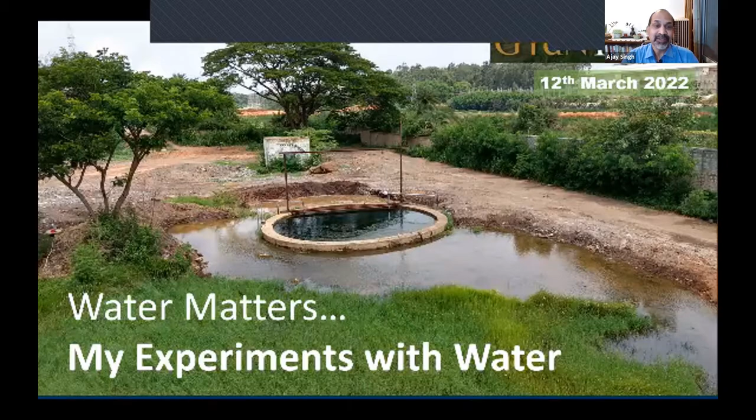My talk is going to be in form of a presentation, but it's not going to be a very staid and a sarkari kind of presentation. That much I can guarantee you. Okay, so I think nowadays all of us agree that water is something about which all of us have to become serious. And as Apurva told, not only in the context of the residential scenario, but even in organizational scenarios like railways or factories.

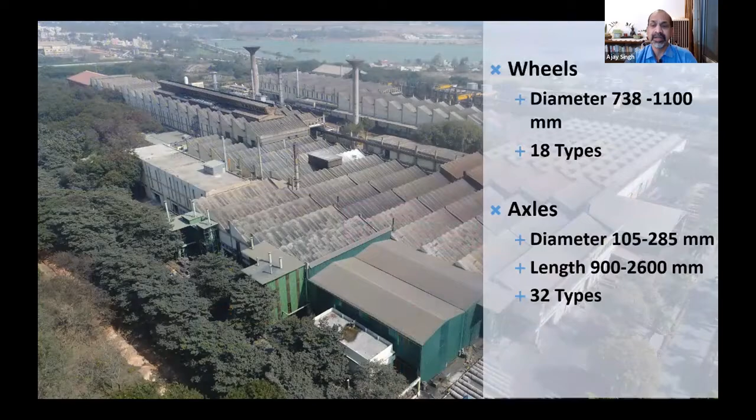So today I'm going to share my experience of Rail Wheel Factory, where we were able to successfully take the requirement of our processed water from rainwater harvesting at a very, very large scale. In this presentation, I'll be mainly focusing on what we did. There are many questions which I'll leave to the end of the presentation. So Rail Wheel Factory is a unit situated in Bangalore. It's a unit of Ministry of Railways, and we manufacture wheels and axles for railway applications. And this photo, by the way, has been taken by Apurva.

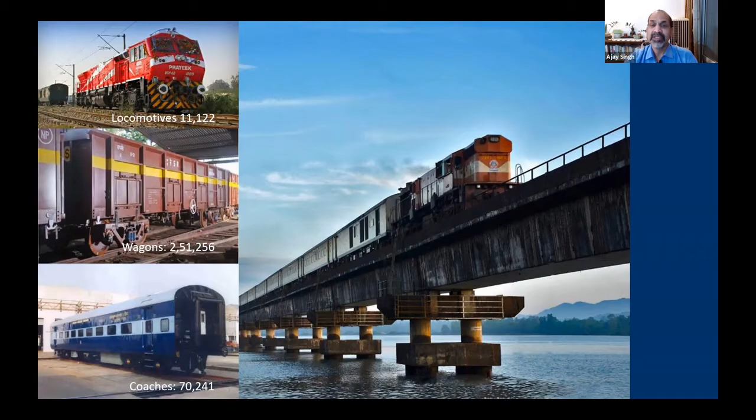This explains where Rail Wheel Factory fits in the overall scenario of Indian Railways. Indian Railways has a very large fleet of rolling stock. We have almost 11,000 locomotives, more than 2.5 lakh wagons, almost 70,000 coaches. And all of these have something called a bogie. Normally a non-railway man calls a coach, the passenger vehicle where one sits, a bogie, but that's a misnomer. A bogie is a structural part which sits below the coach and the wagon as well as the locomotive.

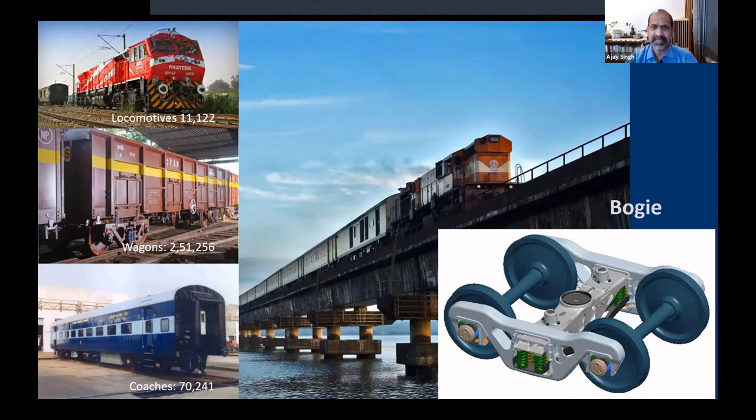So at Rail Wheel Factory, we make the wheel set. The component you see here in gray, the two wheels and the axle combined, is called a wheel set. We manufacture wheels, axles, as well as wheel sets. On a typical day in Rail Wheel Factory, a wheel is cast every 2 minutes, an axle is forged every 4 minutes, and a wheel set is formed every 6 minutes.

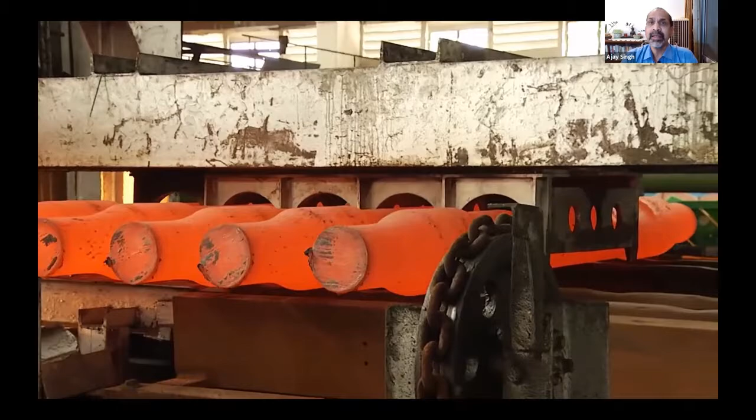So this is a small video clip I'm just adding. You can see when we are casting almost 400 tons of steel and forging almost 200 tons of steel every day, definitely the Pollution Control Board will classify us as a red category industry.

So we do have a large water footprint, and if you take RWF's water balance, our fresh water is sourced from STP, BWSSB fresh water, recycled water from BWSSB, that is Bangalore Water Supply and Sewerage Board. Sometimes, very rarely, we get water from tankers also. We have our own bore wells, and we do have some open wells.

On the consumption side, the main consumption is inside the plant. We have the administrative building, hospital. We have two residential colonies, East Colony and West Colony, and we have a big marriage hall called Utsava. So RWF is spread over a campus of almost 291 acres, out of which 191 acres is in the plant and 100 acres in the two colonies.

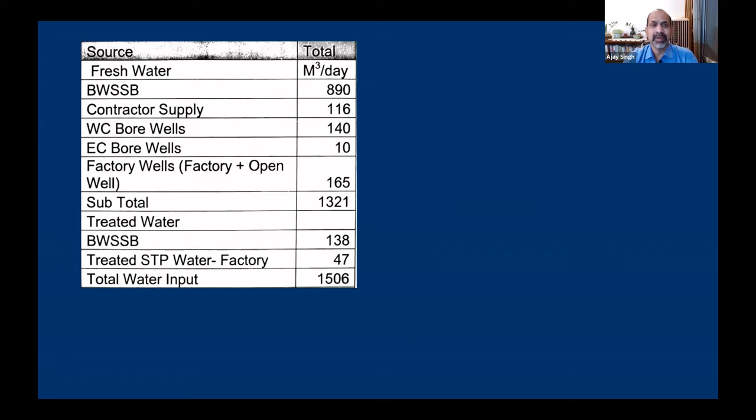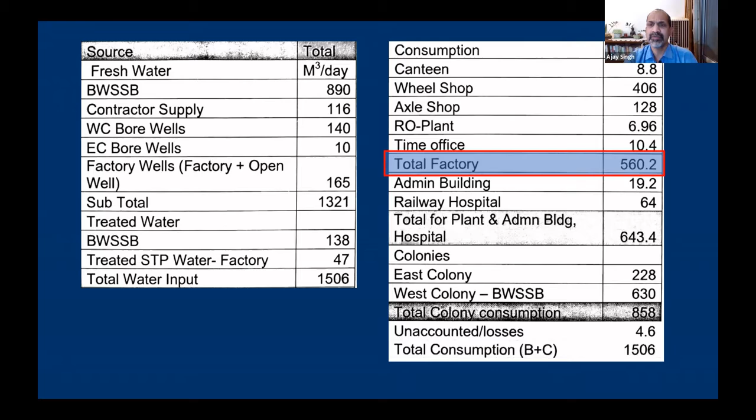So if you see on the supply side, we are almost getting 15 lakh liters of water every day, which we are consuming. This is a measure of how it comes from various sources. And on the consumption side, again, this balances off. And basically, inside the factory, we are using almost 5 to 6 lakh liters of water every day.

Now, inside the factory, the main consumption of water is for process cooling. Basically, we are a hot shop. We are a big foundry, huge foundry. And for cooling of our furnaces and other equipment, we need almost 2 to 3 lakh liters of water every day.

When we see a typical wheel, or for that matter, any product, we think that it is only made up of steel and various alloys and other things. But now a concept of embedded material has also come up. If we really see, lots of things are embedded in it. All these are substances, elements and raw material which, besides the normal raw material, have also gone inside the wheel.

So if you take a typical wheel, besides the steel and other things, it will have water. It has a sand footprint, lots of plastic in packaging of incoming raw material and other things. Wood is used in packaging. So it is having lots of embedded substances inside it, besides the obvious raw materials. Now, water amongst this is one of the most important embedded elements.

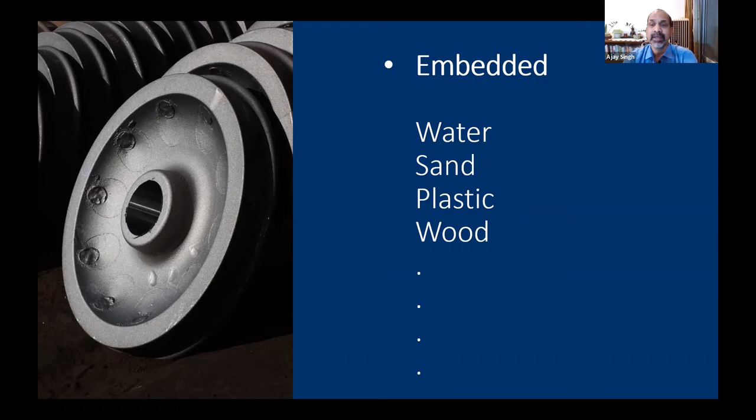And if we do a rough back of the envelope calculation, we make almost 1.5 to 2 lakh wheels every year. So in each wheel, 200 to 300 liters of water is embedded.

We do have a... excuse me.

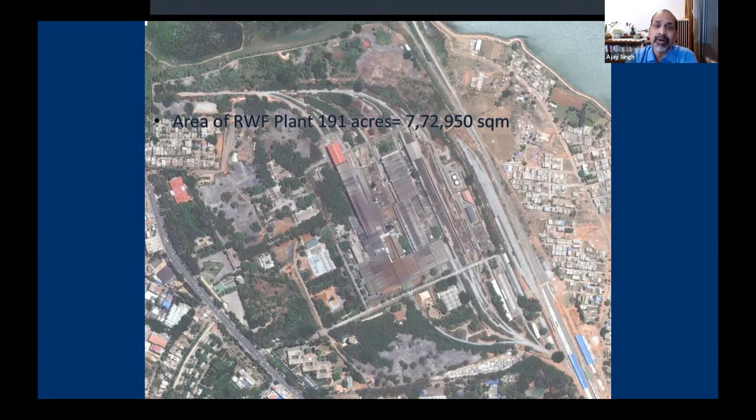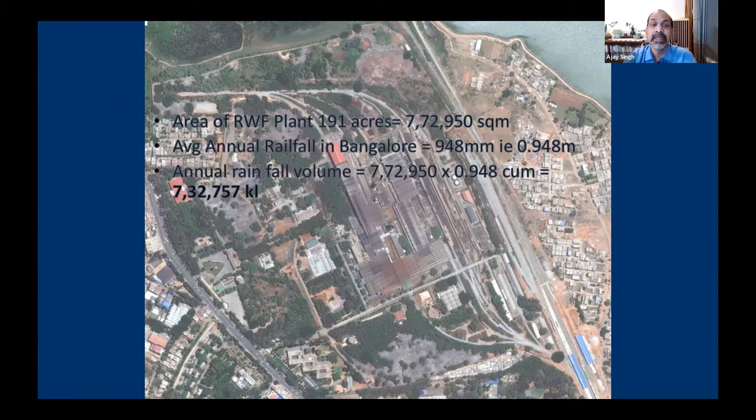The area of plant is around 191 acres, which roughly translates to more than 7 lakh square meters of land area inside the plant. If you see the annual average rainfall in Bangalore, it is almost a meter, and multiplied, the rainfall which comes on the campus of the plant is more than 7 lakh kiloliters.

So once we started this project, this was a rough calculation we did, and our plant daily requirement, taking around 3 lakh liters per day and 300 working days maximum in a year, was coming to 90,000 KL. So you can see very well that as against annual rainfall coming onto the complete campus of 7 lakh plus kiloliters, our requirement was only 90,000 kiloliters.

So this gave us some kind of assurance that if you are able to harness a good part of rainfall which is incident on the campus of RWF, we will be able to meet our process water requirement. So we started with this premise. We also found out that the maximum lean period, based on 100 years of meteorological data, is 100 days. That is in our part of Bangalore. Within 100 days, definitely some kind of rains will be there.

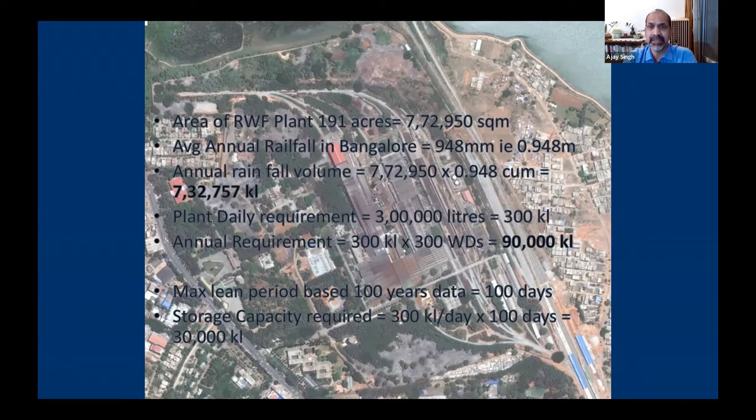So if you take a straight back of the envelope calculation for engineers, the storage capacity required is 300 kiloliters per day into 100 days, almost 30,000 KL. But after this calculation, I abandoned all engineering. In this project, what we used is basically the rainwater harvesting techniques which are prevalent in traditional rainwater harvesting. And in this complete project, where we became water self-sufficient for process water, we did not create any big concrete storage structures and others. We'll see as we go ahead with the presentation.

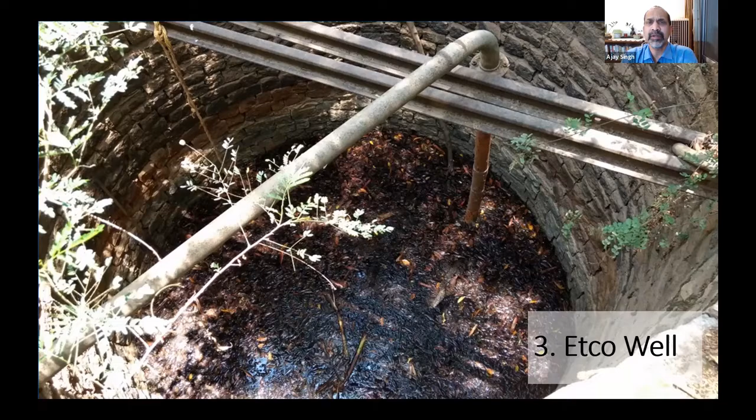So this is a close-up of the RWF plant area, and we had a low-lying area. So what we did was we tried to develop our project around this low-lying area. And when we looked around, we found that there were 2 wells there. One was named Kandaswamy well, another was called Damodar well. Then on further inquiry, we found out there are 2 abandoned wells also. The third well was called Etco well. And somebody told me that there is a 4th well. It took almost 1 month of hard looking around and clearing off a bit of jungle. Then we discovered that, yes, the 4th well was there. So when we started our project, we had 2 active wells and 2 totally defunct and abandoned wells.

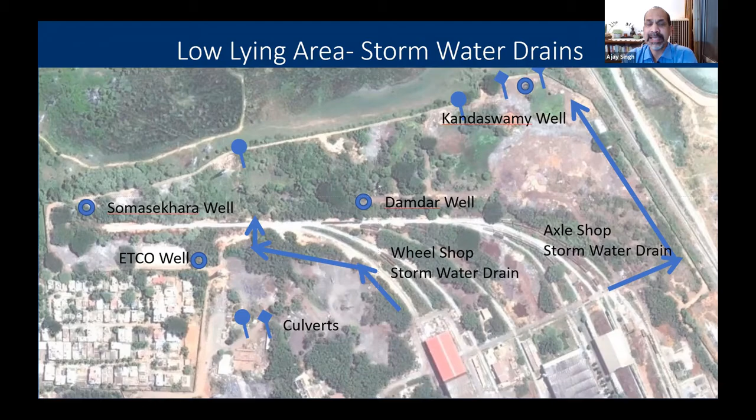So for the catchment area, we can distinctly tell that one catchment area was of the axle plant, another was of the wheel plant, and there was a third catchment area which was basically covering our front entry area and our marriage hall area, which is called Utsav. So these 3 catchment areas we identified for the complete plant. And luckily for us, this low-lying area had inherent boundaries. On the north of it was the actual wall boundary, which separated this low-lying area from the Putanhalli Lake and marshy land beyond it. And on the south side, you had this straight white line, which is the track, on an embankment.

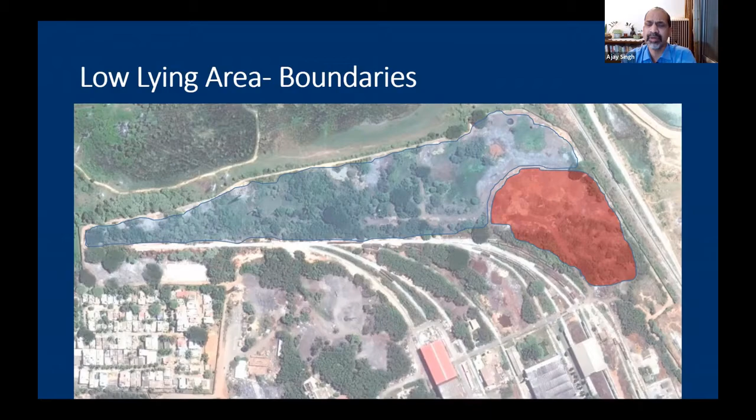And this red area is where we dump all our foundry waste which we cannot co-process and use. Over a period of 35 years since this plant was in existence, we have kept all this material. So these three formed a natural boundary for our low-lying area, and we started working on this low-lying area. That was the plan. So this is a still close-up of the area. In the satellite image itself, you can see this small well, Kandaswamy well. We have one well inside here called Damodar well, and another fourth well somewhere here. These are the stormwater drains.

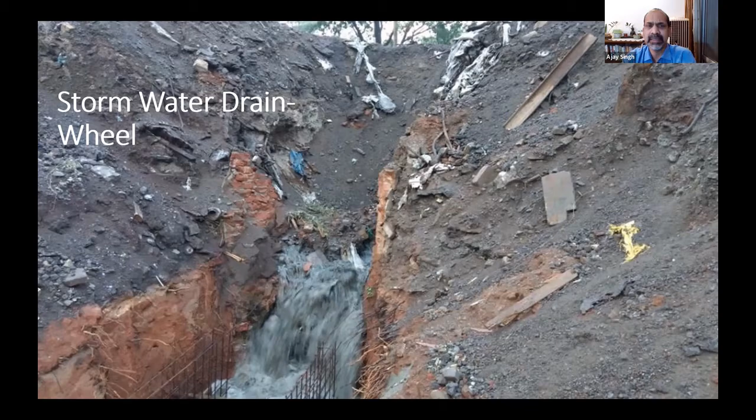So initially, when we started this project, we thought we will make our own lake inside the factory. So we named it VAP Kere. VAP is basically wheel and axle plant, which is the original name of rail wheel factory. The plant started as wheel and axle plant in 1984, and in 2004 it was rechristened as rail wheel factory. Still lots of people have very fond memories of the name VAP. So we named the water body we were planning to create VAP Kere. Kere is basically a lake or a pond in Kannada. So this is the name of the lake we thought we'd make.

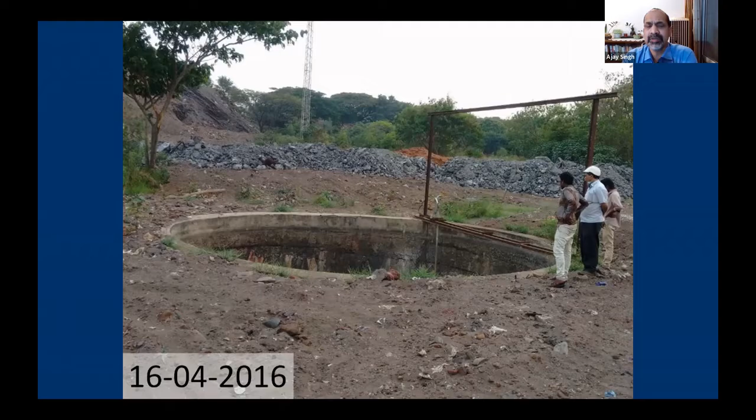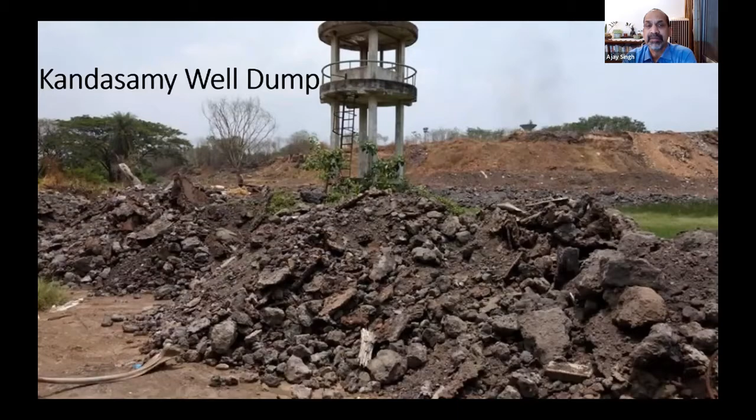We started this project in 2017, but I had visited it one year before, in April 2016, and this was the condition. You can see in the background, foundry waste is lying, and this is our biggest well, the Kandasamy well. It's almost dry. And around this area, lots of dumping was taking place. Besides the foundry waste, lots of mixed waste, even the canteen waste was going there. This was the scenario we had when we started this project.

In some other part of that low-lying area, we had lots of packaging being dumped there. People had started burning waste also, as they could not think of any other way of disposing of it. So this is one of my colleagues in the white shirt, Mr. Siva Subramaniam, who played a key role in the project. And behind him is Mr. Vishwanath. He's my water guru, and he's a very prominent water figure in Bangalore.

So he came, and when he saw the wells, he was very excited. He told me, if you take care of these wells, you will be able to get your process water requirement of 2 to 3 lakh liters. So that gave me some confidence. In front, the red board you see is the original data for the well. The well is almost 10 meters in diameter and 12 meters deep. It's a huge well, the biggest well in the RWF campus, but still its yield was only 25 KL per day, 25,000 liters per day.

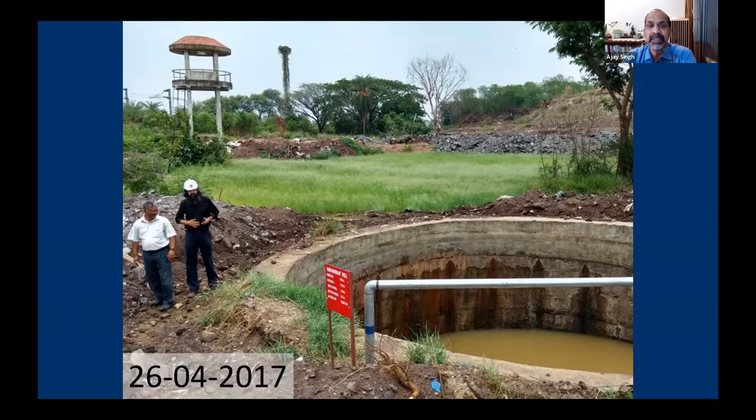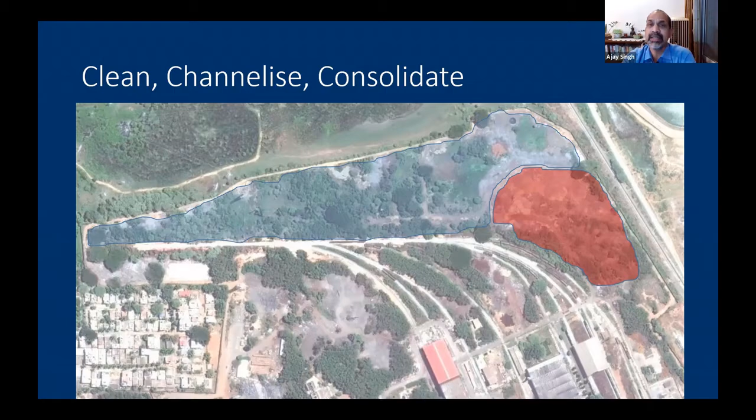So we started properly after Mr. Vishwanath's visit. We formally started phase 1 of the project on 2nd of May 2017. We thought that we'll clean up the whole area, we'll channelize different water streams, and we'll consolidate whatever water bodies we create. With this motto, we started off. First and foremost, we took out some old railway sleepers, put them there as markers, and created an eco zone. We told everybody that this is now an eco zone, and no one should dump anything in that area. So we first stopped fresh ingress of waste material in that area.

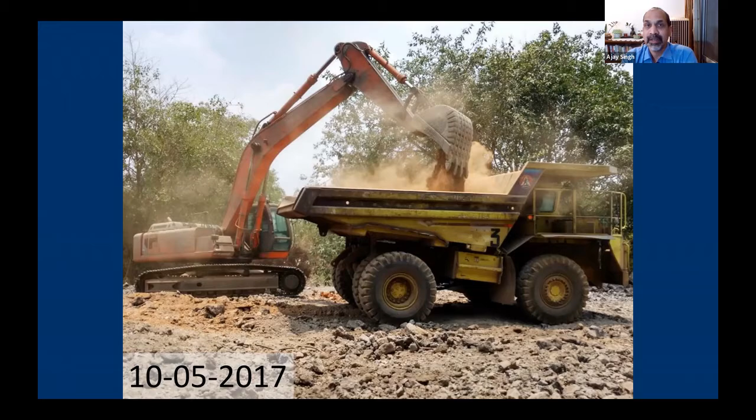On 27th of May, Mr. Vishwanath, who's got a Twitter handle of Zen Rainman, published an article in The Hindu on our project. Our project, mind you, had just kicked off, and he wrote that a walkabout can save the city, and he gave our project as an example. That was a big booster for our team. We thought, okay, we are just beginning, but we are on to something really good and really positive.

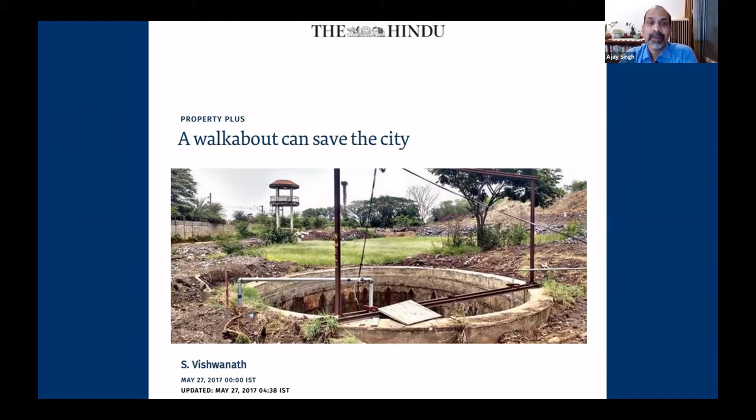And actually, when I had planned for joining as a part of the inauguration, I never knew how much water, what kind of water, was there.

On World Environment Day, 5th of June 2017, even before the project went on full steam, I declared in the function that we are going to have this project. We are going to create our own water bodies, revive them, and become self-sufficient in our process water requirement.

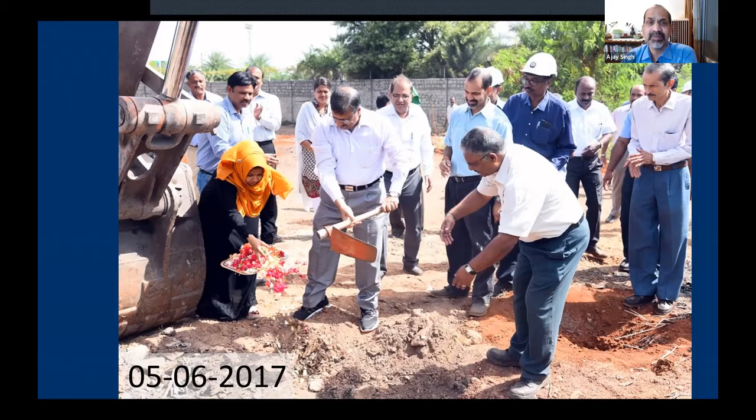We took the head of our family, the general manager, Mr. O.P. Agrawal, and we asked him to do the groundbreaking for the function. So he did that, and we took all the senior officers and asked them to do some tree plantation. By the time the tree plantation was being done, we had placed our poclain in such a manner that in one go, he was able to connect the two water bodies.

And like a very good omen, a good portent of things to come, we saw water gushing in from one water body to another. It was a very positive sign, and we were very happy about that.

One of my colleagues, the security commandant, who is otherwise a very stiff and rigid RPF officer, brought some ducks for the occasion, and he left those ducks in the water body we had cleared.

So after this, the function and everything was over. Then phase 2, the real act, started. From the 6th onwards, the real work started.

And to my disappointment, what we saw on the 6th was that we had joined the two water bodies, but whatever water came from the upper water body to the lower water body just went out from the culvert.

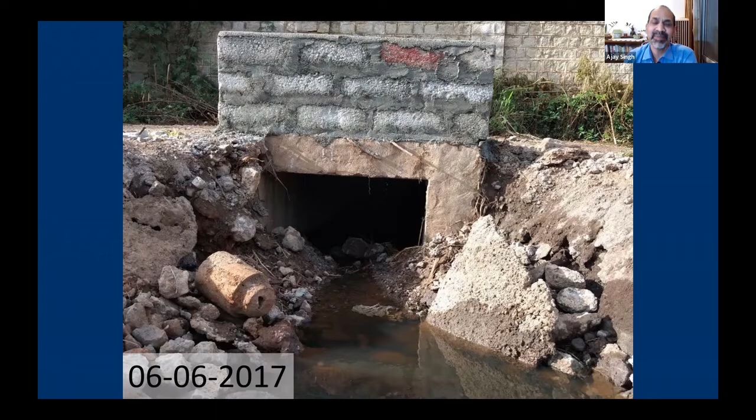So that was kind of a big setback, and we started thinking what to do. This is the place from where it was going out, simply going from the so-called not-yet-to-be-born Vapkere to Puttenahalli Kere.

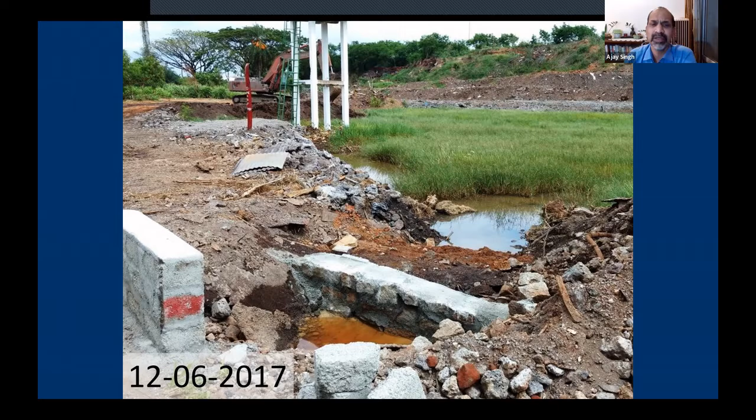So I thought about making a simple bund here. We created a wall so that our water would be held inside our campus, and only excess water would overflow to the culvert. So there was a small intervention which we did, and after that, you can see this bund in action here.

First, we started working on the stormwater drain. We started diverting it. We made some concrete path for the water to flow down because it was at an elevation of almost 5 meters.

It was very deliberate. It was kept kaccha so that lots of water would get absorbed there, and the wild vegetation that grew inside it would slow down the velocity and force of the water. Otherwise, there was a chance the water, coming with so much force because of the gradients, would overshoot and might even damage our boundary wall.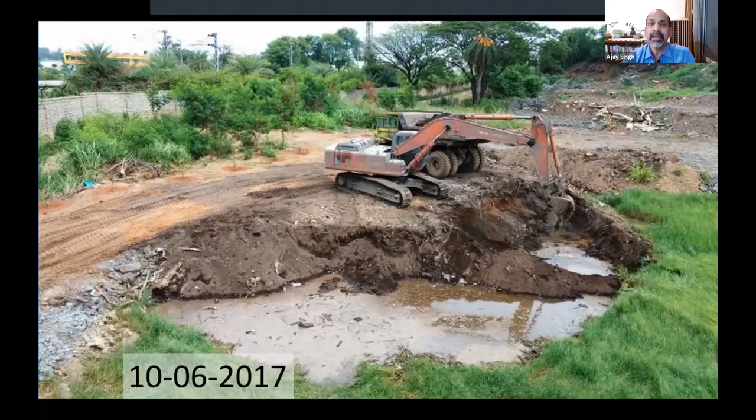So we created a water path like this towards our water bodies. And on the other side, we started enlarging this water body. This is the exact location where we did the inauguration of the project. You can see we have deployed the Poclain and the dumper, and we are digging out the area.

While creating this water body, we had not used any cement. We have not even used anything for stone pitching or for securing the embankment. We just left a slope and let the plants and everything take care of it. So these are some of the pictures over a period of time. During the initial phase when we were enlarging this reservoir, you can see already so much water has collected there.

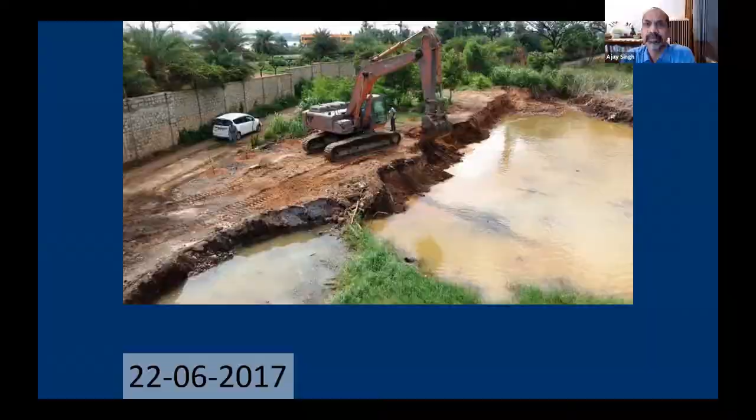On one of the days, rather it was a night, 8 o'clock, when I was going around this, on the right side, the stormwater drain is there on the height from the axle shop. It comes and almost takes a very rough 90-degree turn. It's very violent here because it's very difficult to tell water to take a right turn or left turn.

So we thought that if we leave it as it is, the force of the water will cut the road which is there, the peripheral road on the left, and it will damage the boundary also, which you can see on the left. So we did some kind of stone pitching here and made a gentle sloping curve so that the water can get diverted 90 degrees here.

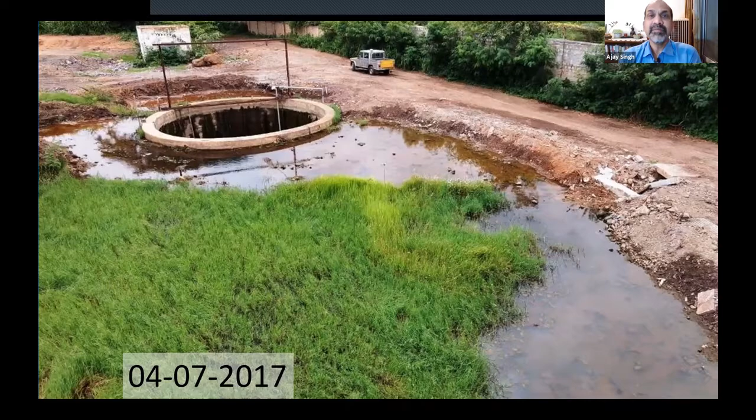So after a month or so, we had enlarged the area around the well. You can see a freshwater body has been created on this side. The digging we saw was on the other side, and this is the reservoir that was created. You can see the slopes are still raw, they have not yet stabilized.

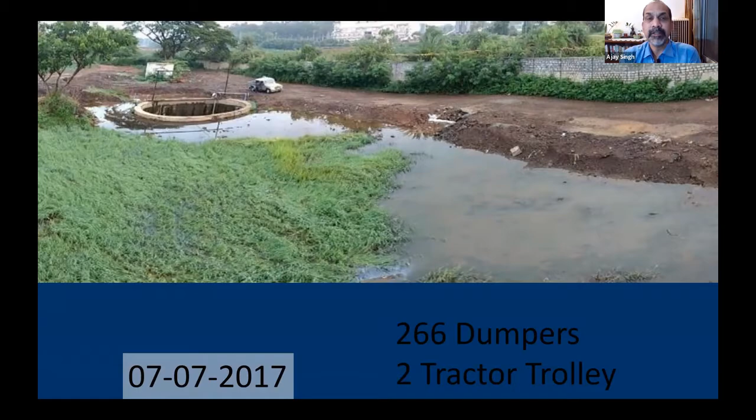So by 7th of July 2017, we had already moved almost 266 dumper loads of muck as well as earth that we took out for creating these water bodies, and 2 tractor trolley loads of various packing material and other things. So here you can see the well, it is full, and this well itself, when full, holds almost 10 lakh liters of water.

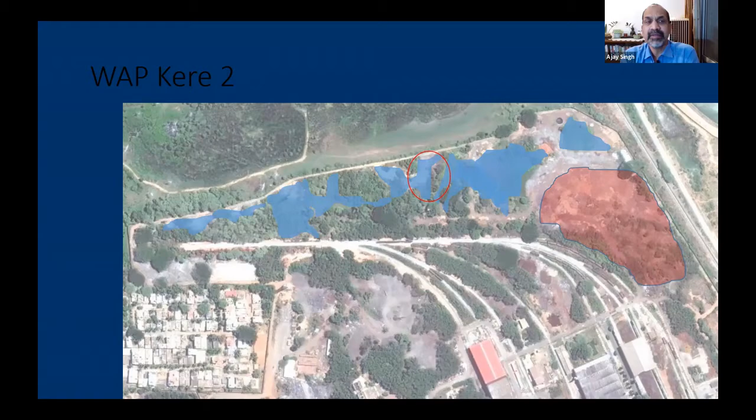Then after this, we moved on to the second phase of the project, which we call WAP Kere 2. So this was actually one of the water bodies. You can't see any water body here because it has been filled up with all foundry waste and debris. So here we started digging, and after about a month of hard work, we could create this water body.

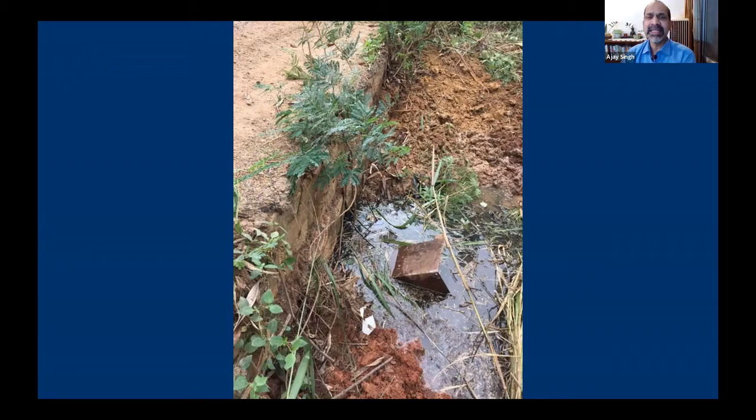At this stage, we again encountered another culvert we discovered where water was going. So here also we did an intervention. We didn't make a proper masonry kind of bund, but we just made a mud bund around this so that area will also hold water.

So then this is how we charge the Damodar well. This well already was our best yielding well, but before we rejuvenated this area, it was giving around 75 KL daily output, which again went double to almost 1.5 lakh liters of output every day.

Then we started working on a remaining portion of the lake system that we had planned to create. We went to the seventh segment of this, and we created a very linear kind of water body there. These are some photos during the making of that water body.

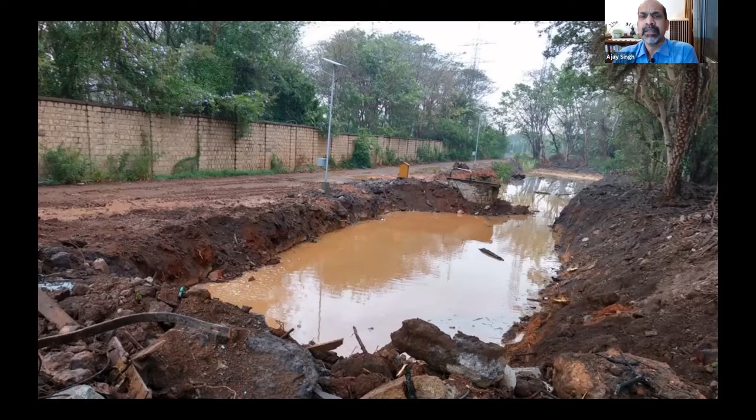After this was made, following the first rains, you can see it has water, but it's very muddy because the soil dug is very fresh. This was the well which was recovered in the center.

Then we actually came to the other side of the track. All these 3 wells were on the north side of the track. Then we came to the south side of the track to take care of the 4th well, which was the Itko well.

The Itko well was getting water from the catchment area of the Wheel Shop as well as from outside, from the Utsav side. So we had a very peculiar thing there inside.

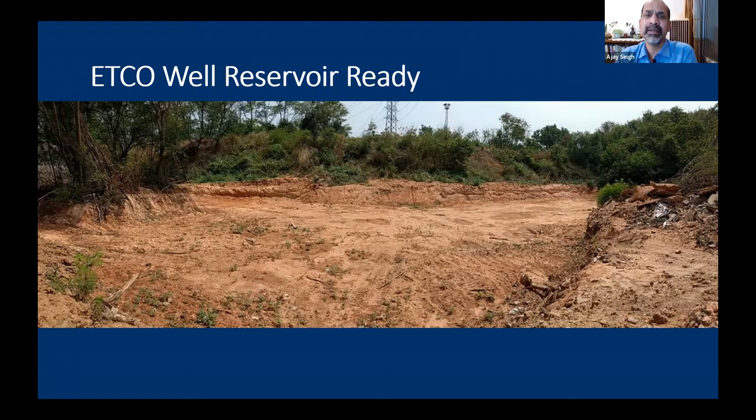In the background, what you see is the embankment on which a railway track is there. So this was just abutting the railway track. After the first rains, you can see this is full of water, and of course, because it's the first rain, it's all muddy.

This from one end and this from the other end, where at the far right you can see the well also, here is the ETCO well. So we created a big water body all around, which went into the area where the stormwater drain from the Wheel Shop was coming. This was the fourth well which we rejuvenated.

This also started yielding almost 15 to 20 KL of water every day. This new reservoir, since it was totally dug new, took almost 2 to 3 years to stabilize, and nowadays it has started holding water. Otherwise, after rains, within a week or so, all this water used to disappear.

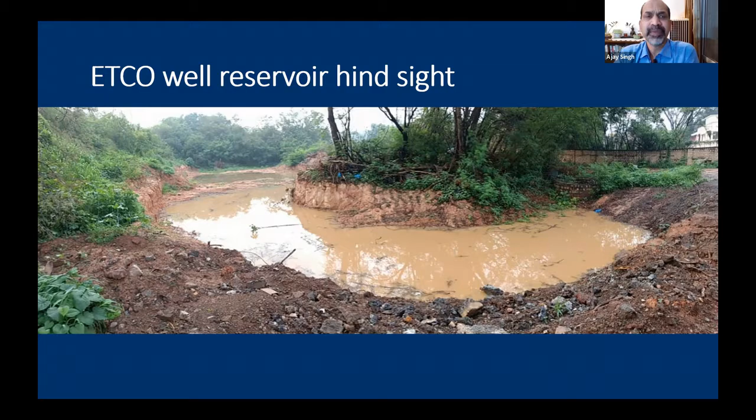So this is well number 3, the fourth well in our talk, which we rejuvenated. And this is the reservoir we created. It was getting feed from the Wheel Shop catchment area, as well as from the area I told about, the Utsav. This is the place, the red dot, where we created an opening in the marriage hall area boundary.

So that the water could flow like this. This is the small opening, a 1 foot by 2 feet opening what we made. This also solved the problem of flooding inside one part of the marriage hall.

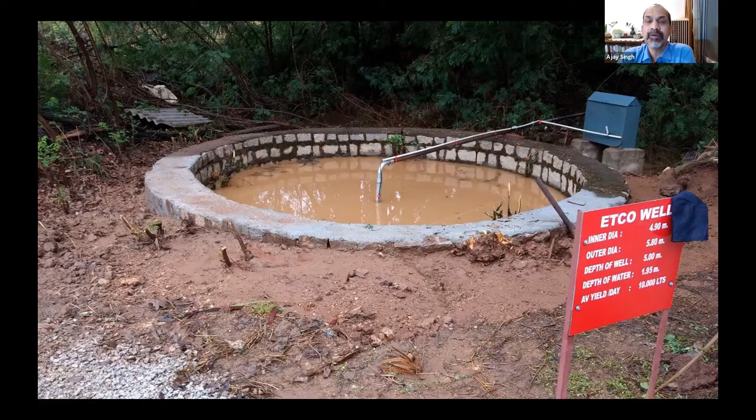So this is a photo of the well after we had rejuvenated it. Of course, because the wall was very low, even the surface runoff entered, and that's why this water is very, very muddy. After that, we took up cleaning of these 4 wells also.

So this is how we started our journey. This was the condition of the ETCO well when we started, and this is post-rejuvenation. So this is, in a very fast manner, the 4 water wells we rejuvenated and how we rejuvenated them. Of course, the whole exercise was spread over almost a year, and in between we had a big setback.

Adjacent to this, our water body is there. But one fine day, somebody told me that one big area of 50 meter by 100 meter in that place is being handed over to Southwestern Railway for putting up a traction substation. This would have destroyed our complete project, because this is the first landing for our stormwater drain where the water was coming and getting collected.

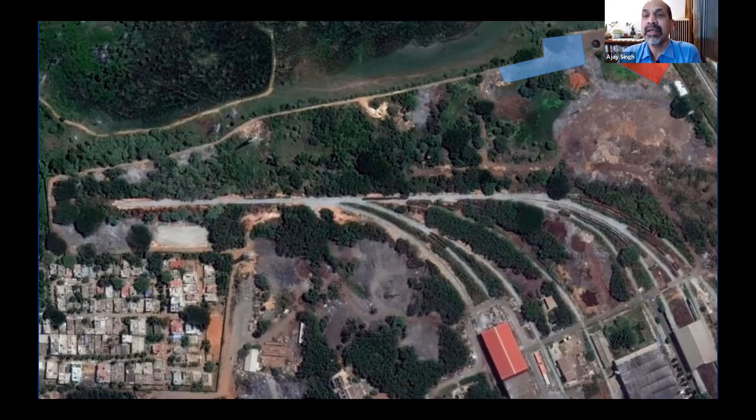So we opened a dialogue with Southwestern Railway from RWF, and we persuaded them to shift this traction substation to a slightly adjacent location. And in the process, we saved our main water body. And one very interesting thing, this is the constructed traction substation. The traction substation is behind this boundary. So we took advantage of this problem and we turned it into a solution.

I was taking out lots of earth for creating these water bodies. In fact, by the time the project matured, we had moved more than 1,000 lorries of either muck, mud or earth for creation of these water bodies or clearing this area. This traction substation is an electrical substation, so it has to be at a height. And since this was a water saturated area, you can see there is a ground level which is higher than the ground level outside.

So all the earth we were taking out from the water bodies, we dumped here, and we used their area of 50 meter by 100 meter to deposit it. Secondly, we gave them the land but not the water. Whatever rainwater was falling, we asked them to design in such a manner that we had weep holes all over the boundary, and a collection gully all around this, which used to feed into the reservoir for the Kandaswamy well. So this problem we turned into a solution for ourselves.

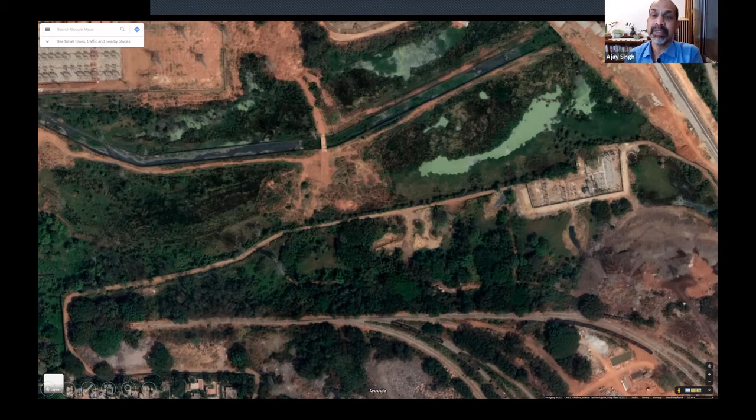So this is now the constructed traction substation. You can see this water body is not affected. Here also there's a water body which is not affected, and in a corner we gave them the land. So this was one of the problems which came up while turning this whole low-lying area into a wetlands water body. But there was another problem going on in parallel, for quite some time.

Since we are a big foundry and we are almost inside the city nowadays, we had to take lots of efforts for dust mitigation in the exhaust of furnaces. So we had this huge structure called the primary fume extraction system, through which all the hot air from the furnace exhaust used to get cleaned of all dust particles, and the emissions coming out of the chimney will not have any suspended particles.

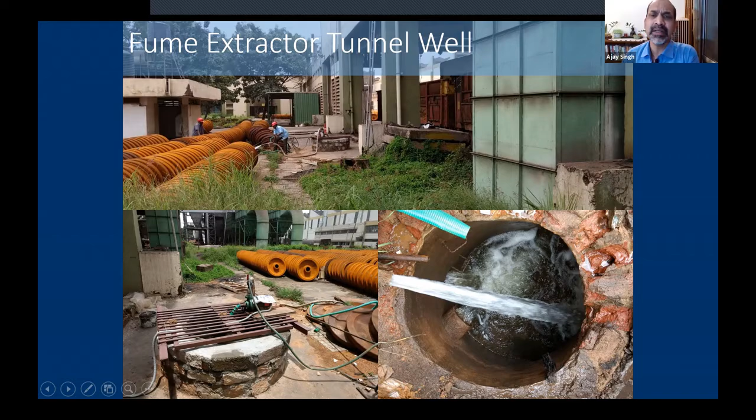This immediately affected the efficacy of our fume extraction, and our emissions were increasing. So to solve this problem, we sank a mitigation well adjacent to the fume extraction tunnel to take care of the water seepage. We put an auto pumping arrangement in this, and this well started yielding water without our intervention. In our furnace basement area we put another well, and the average daily yield of these two wells combined was almost 16 kl.

Cumulatively, in this old data, we had more than 1 crore liters of water from this problem. These two wells were created to solve the problem of water seepage in the tunnel, and they kept on giving water output, which we put back into our cooling water system.

Then we went to create another thing. We saw that during rains, from our down pipe, this is a 6-inch diameter down pipe, you can see the extent of water which comes out.

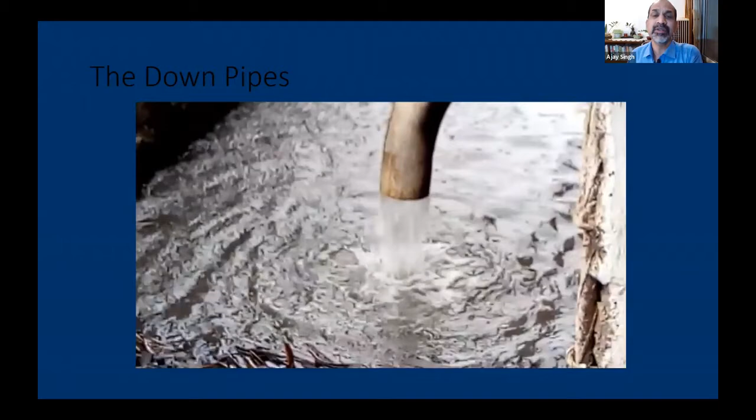So what we started doing was, we made something called a rainwater mega harvester. This I designed based on my experience of designing bio toilets for Indian Railways. In this, we diverted 6 of the down pipes from the rooftop, and the rainwater will come, it will get filtered, it will get sedimented, and with overflow in this big 60 centimeter pipe, it will go to the cooling water circulation system adjacent to this installation.

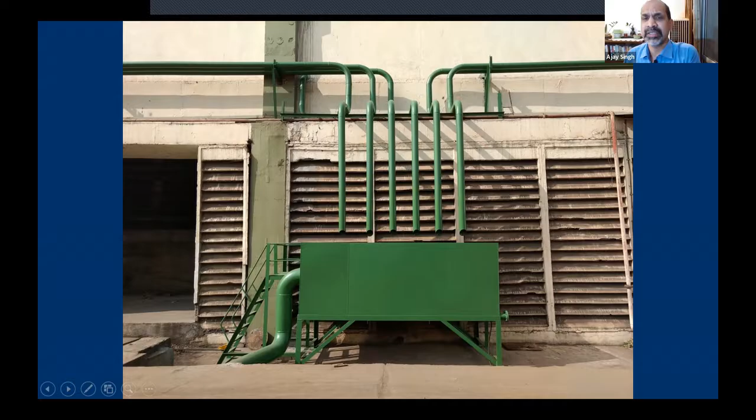So this is the first trial we did after one of the rains. You can see this water is getting collected here, and it is getting shifted to the adjacent cooling water system. You can see the yield here. So the best part of this installation was that we were capturing not only rainwater. In the earlier instance, when we were developing the wells, we used to collect rainwater at a mega scale, let it go and get seeped, and we extract the water. So lots of pumping was involved.

In this installation, we were not only capturing the water, we were capturing the potential energy also. These rainwater mega harvesters were automatically yielding almost 25 kl every rainy day. So we put 4 mega harvesters like this, which between themselves were giving about 1 lakh liters of water.

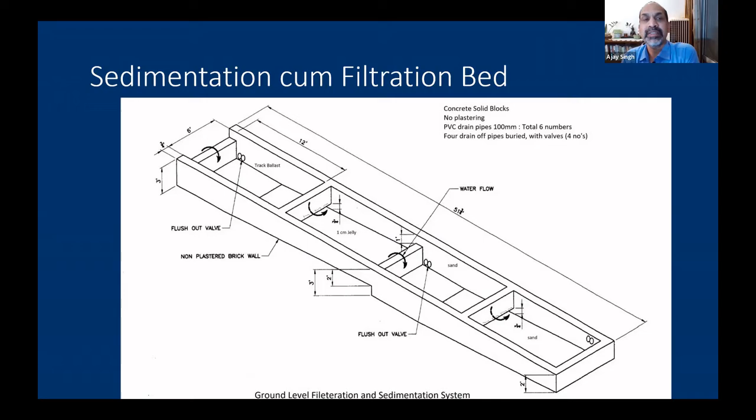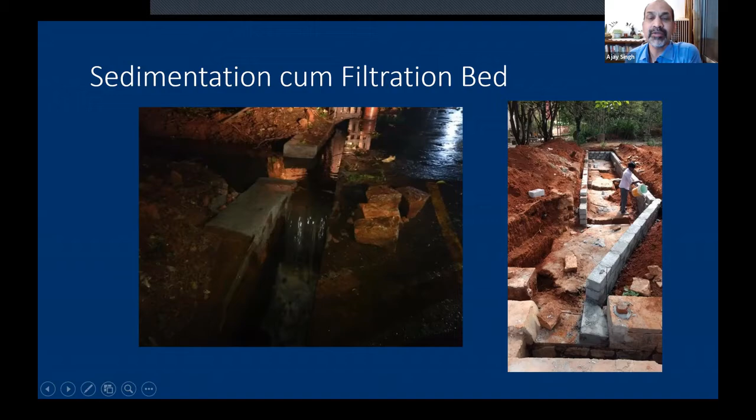In one of the areas near our pump house, which was a low-lying area, we created a sedimentation cum filtration bed, where once again no pumping was involved. The rainwater used to just flow. Here on the left, you can see the rainwater is getting captured, it is getting diverted into this structure, and we were using the head available, the gradients available there, to push the water directly to the ground level reservoirs. two 70 kl reservoirs are there in the background.

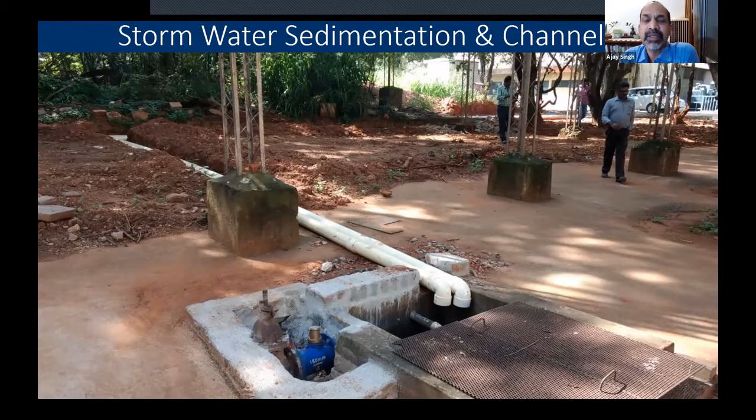You can see this storm water collection channel is there. It overflows. There are 4 sections. The water flows under, then over, and then under, and then finally on its own it flows and goes into the 70 kl ground level reservoirs. So this is after construction, and here you can see the pipes which we laid for putting the water into the 70 kl ground level reservoir. The structure is in the rear here, and here you can see during trials.

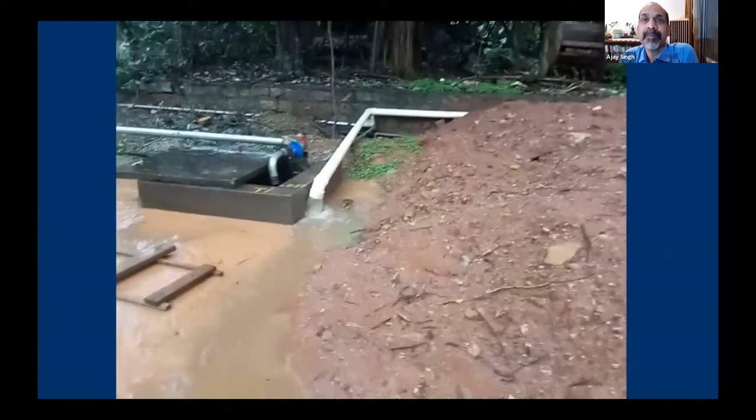This is after rain. You can see water is just coming out. There's no pumping involved here. Water is getting sedimented and filtered, and these are the two outlets. Just before we connected it to the outlet, we were testing. So you can see such a good flow is there. And this contraption itself was yielding more than 1.5 lakh liters of water every rain.

So because of all this, what happened? We became water surplus. In fact, during rains, we were having water which was overflowing all our cooling water system ground level reservoirs. We have 18 lakh liters ground level reservoir at the pump house. They were overflowing. This is a graph of how we used to source BWSSB raw water for plant cooling water requirement. You can see we started the project in June, and by September 17, we had stopped taking raw water from BWSSB.

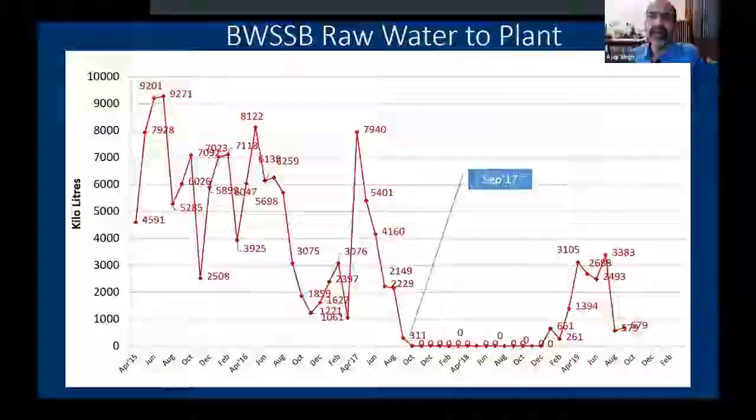But again, in January 2019, we had a very dry season, because of which our well yield was not enough, and we had to take water from BWSSB. So this prompted us to have a rethink. When we did a survey of that area, we found that water is available in that area, but the seepage into the well is the problem. So what we did was we sank 2 more wells there. 2 additional wells were sunk in the ecozone low-lying area.

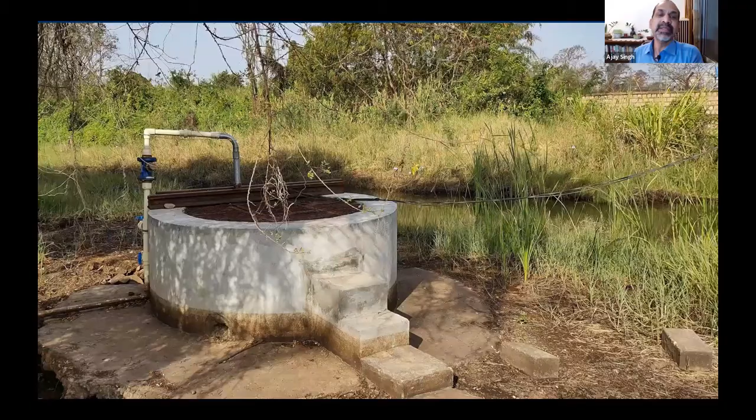So these 2 small wells, we piggybacked them to the 2 adjacent bigger wells which were there. We made a pumping arrangement which used to pump water from the small well to the bigger well, and from the bigger well we already had the big pumps which were carrying it to the main ground level reservoir. So we saved the lead, the pumping, piping and all.

And the trigger for these smaller new wells, the 5th and 6th wells, was from the big well itself. Once you start pumping in the big well, automatically the small wells start pumping into the big well. Of course, we became water self-sufficient by doing that.

So when all this was happening, somewhere in 2019, suddenly the media took up this thing that Bangalore is going to have a water crisis, Chennai, Bangalore and all are going to run out of water. In fact, there was one famous BBC news article which said that after Cape Town, Bangalore is the next city which will run out of water. So somehow, because of this or otherwise, our project caught the attention of Bangalore city, and we got lots of media coverage over a period of 1 or 2 years.

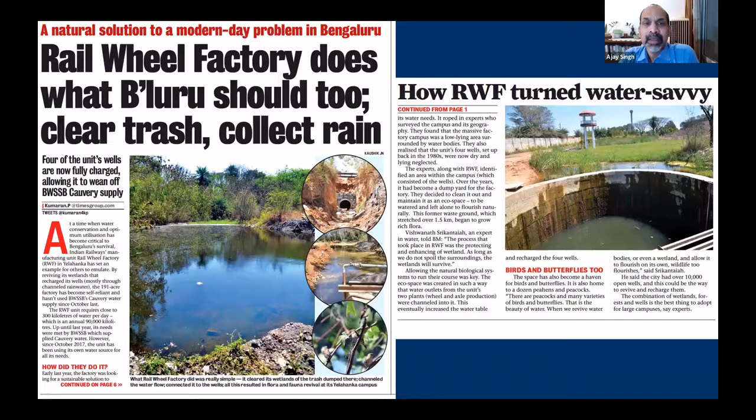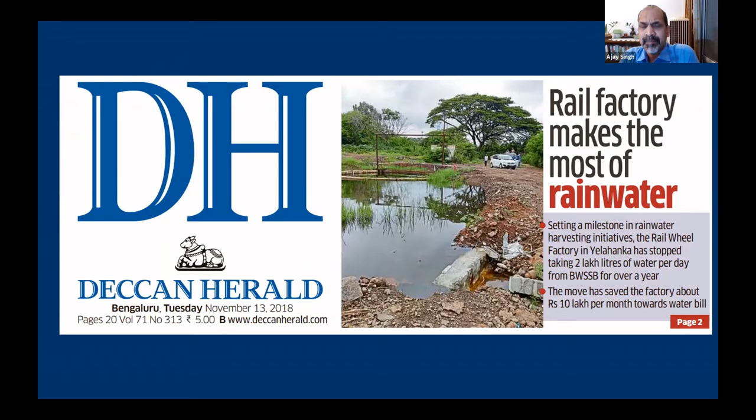In fact, this is a paper from February 2018, when Bangalore Mirror gave us front page, top of the fold coverage, where they said that Rail Wheel Factory does what Bangalore should do: clear trash, collect rain. And they did almost 1-page coverage of our project. Then it was followed by many other papers. This is Deccan Herald. They gave us the main page, top headline, as well as inside coverage. This is again a second coverage by Deccan Herald.

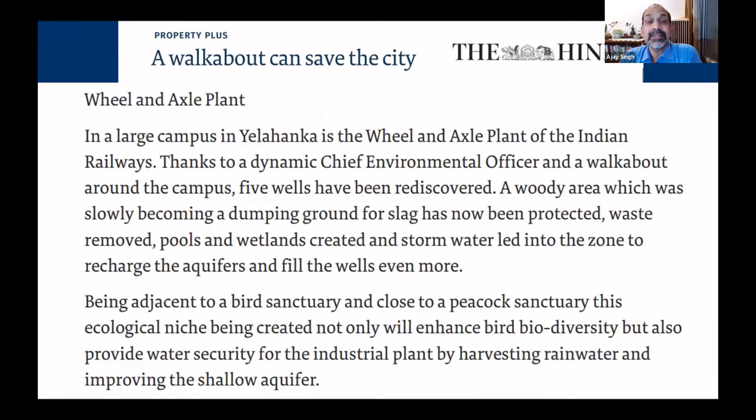Then, of course, it all started with a write-up by Mr. Vishwanath in Hindu Property Plus. There he actually wrote about the wheel and axle plant, he used the old name, not the rail wheel factory. So there he talked about our project, and that we are going to develop it into an ecozone and wetlands. So this was much before we did it.

And of course, we thought that since water is there, let us stock some fishes. So we got the fisheries department. They helped us identify what fishes to stock, and we got more than 3,000 baby fishes, and we put them in the various water bodies.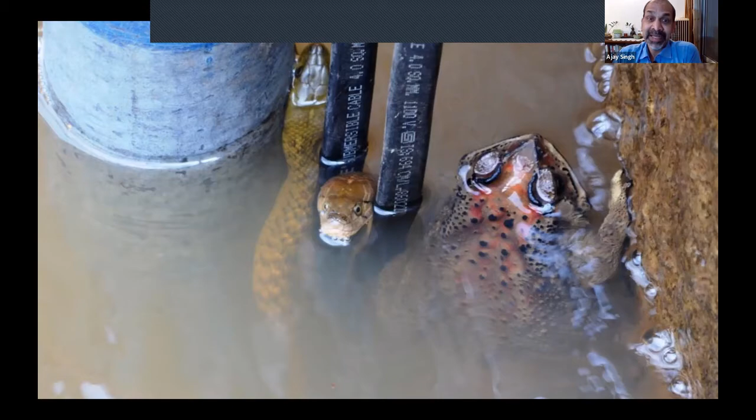This is one of my Nat Geo moments where I captured 2 snakes and 1 fat toad. This picture I took inside the big well, the Kandaswamy well. Of course, the toad lives there, but the 2 snakes got inside the well and they were not able to come out. And the funny part, it's so comical, a fat toad is there, but they are not eating it, because if they eat, they will become so heavy that they will sink and die. So this is one of those rare moments where everybody is just trying to save their life and coexist.

To make these efforts sustainable, after this eco zone was created, we started going to this place during all our monthly retirement functions.

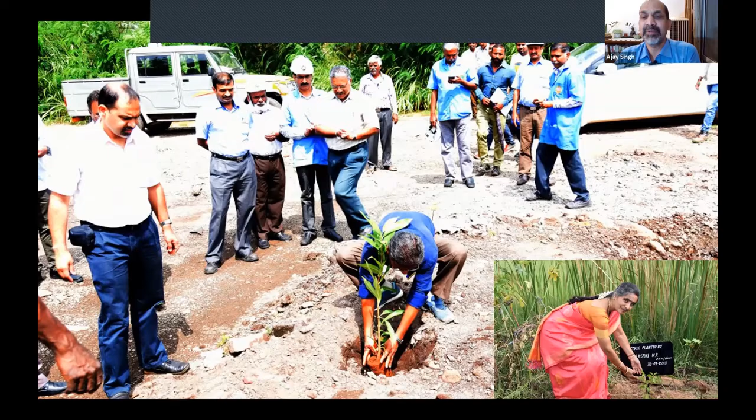We used to take our retiring employees there, and we started getting tree plantations done by those people. Then we had different shramdans organized there for cleaning up the area. And during one of the shutdowns of the plant, we took more than 300-400 people there. They handpicked all the rubble and other waste lying there.

In fact, during this 1 week campaign, they handpicked 25 metric tons of scrap iron and other things which were lying there. And of course, we spread this movement to our school also. We have a Kendriya Vidyalaya, and I'm proud to say that this Kendriya Vidyalaya got top position in the NDTV schools campaign. It was covered by none other than Amitabh Bachchan. I will not show that clip here.

Of course, when we talk about a project like this, this was a very informal kind of project, and it drew its strength from the traditional rainwater harvesting methods and other innovative engineering. So there was no formal project as such, there was no cost estimation and other things. We kept on making small interventions. And if you really add up, it might come to a cost of about 1 crore spread over 4-5 years. And we kept on doing small interventions.

Like this is a photo. One of the nights when I came, I saw that at one place, water is taking a very hard 90-degree turn, whereas on the left, just below this light spot, there is a water reservoir we created. So next day a few of us just took whatever we could lay our hands on. And on the left, you can see this water is coming from this area. We started making a water path so that water can easily flow straight into this big reservoir we created on the right side.

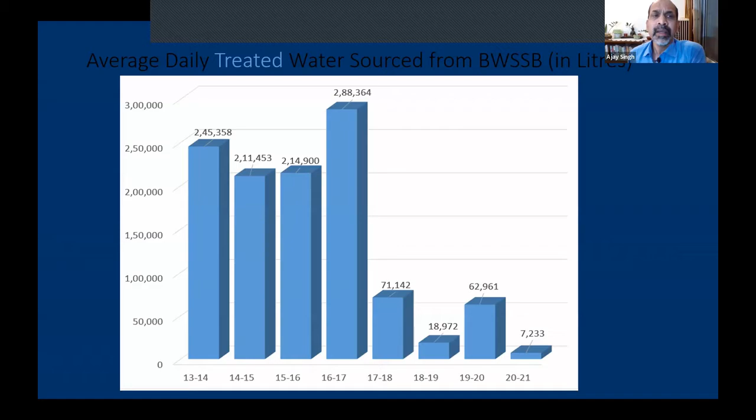So we feel proud that not only have we become water self-sufficient, effectively almost 3 lakh liters we are giving back to Bangalore city, because BWSSB can divert this water from our uses to other uses. Of course, all this has resulted in savings also. Our annual water bill used to be in the region of 4 to 4.5 crores. Now, after 17-18, you can see our annual savings are almost 60 lakh. In 2021, saving is much less because there was an increase in tariff, as well as water consumption has gone up because of higher level of production.

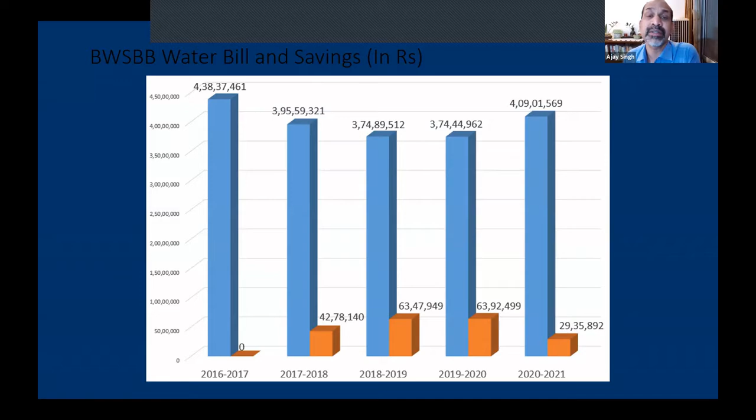But even cost wise, within 2 years of the project, we have recovered the cost of 1 crore spread over 3-4 years. So then we came to the next stage of the project where we started diverting water. So this was the nice garden of our admin. You'll be surprised, but we were using Kaveri water for this gardening. So after we became water surplus, we started diverting our plant STP water for this purpose.

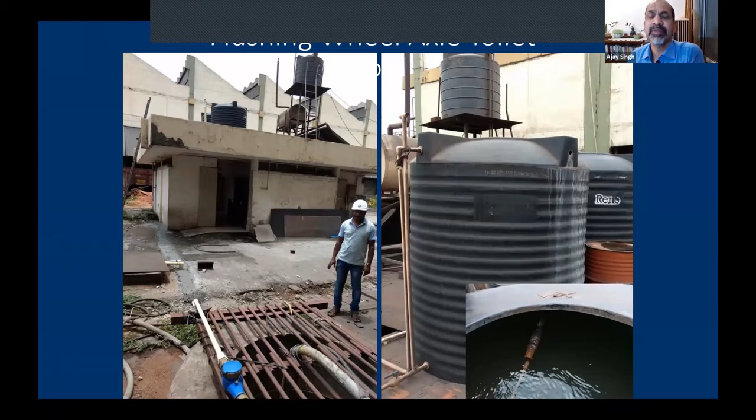Then we started using water which we were generating from the wells for flushing also. Then we had a big fleet of vehicles, so for washing, cleaning and other things, we started using the well water. We had fire engines inside the plant; all this water was well water. Then we started working on different toilets in various workshops and making their flushing arrangements with this well water.

So after these wells were created, in fact, we ended up with 6 wells in the ecozone. In the wheel shop, 3 wells were there. And we had totally 9 wells, 8 active wells with daily yield. And with this, we became the campus with maximum number of open wells in a single campus.

So we are an organization with maximum number of open wells in Bangalore. Cubbon Park, which is a much larger area, has got only 7 open wells. We are already having 8 active open wells in our campus. We did get lots of recognition. We got it at local level, state level, and national level also.

This was my team. Of course, we had support of our senior management also, as well as lots of people, all the way to people who used to operate these heavy equipments like dumpers, Poclain, and others, and lots of people who used to go around and do the tree plantation and others. So it was a very big joint effort. And I must thank, this is my core team.

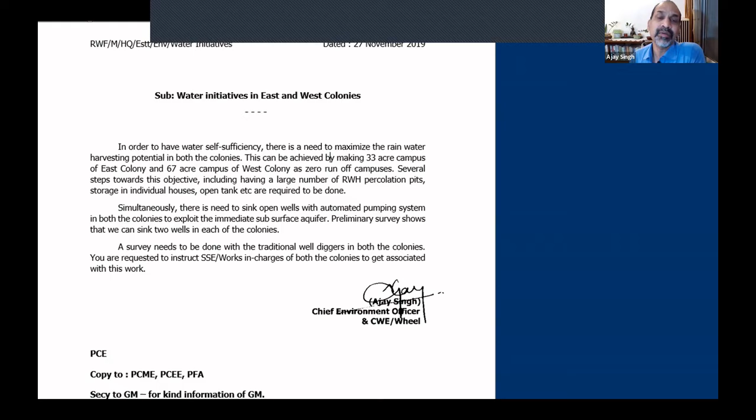So then we moved our focus to water initiatives in our colonies. I started working on making our colonies what is called a zero runoff campus. We are having bore wells there. We have started putting an STP there, and we are working towards a zero runoff campus. But in between, I have moved on to South Western Railway.

Before I move on to the next concluding part of my talk, I will request Farooq Bhai. He wanted me to have a break here. I think he's got a message for everybody. I'll request Farooq Bhai to please come on board. Yeah. So I hope all of you are enjoying the presentation, and I just want to give 2 minutes to Ajay Singh to settle down.

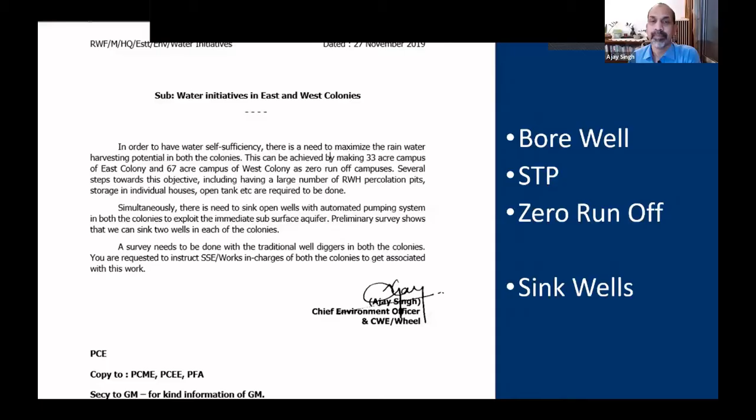Okay, back to the water projects. So in RWF, on the next stage, we started focusing on our colonies. But one question comes, why all this? Actually, when I moved into Bangalore in May 2015, I saw lots of destruction of water bodies. I had left Bangalore in 2004, and after almost 11 years, I was coming back.

This is one of the famous places called Kogilu Cross in Yelahanka. There you can see in the background the heaps of soil. Basically, it was a water body there, and I don't know who the people were. They just covered it up and turned it from a water body into some kind of land. And I really did not know whom to complain to and what to do about it. So I thought, okay, I can't prevent this, so let's make my own lakes. So this was one of the wild ideas that came.

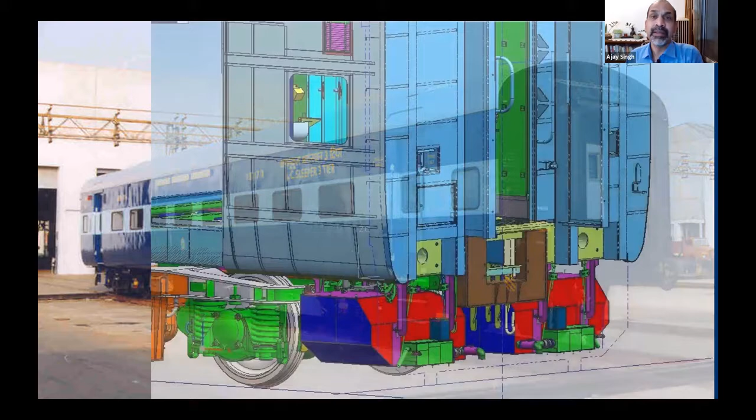And of course, my interest in water goes back all the way to 2007, when I started working on the national project of bio toilets while being in the ministry as director development. So we developed something called bio toilets, and now if you have traveled in the last few years, you will notice that human waste is no longer falling on tracks. This was a joint project between Indian Railways and Ministry of Defence. In the process, I became some kind of shit expert.

More than that, I realized that in the Indian context, toilets have a deeper, fundamental issue of water, especially in rural areas, because I was interacting with the Ministry of Rural Development, and they were struggling to install bio toilets in villages. So anyway, that's how my water interest really started.

I had the fortune of interacting with some people doing real good work in the field of water, very quietly, whether it is Sopan Joshi, associated with Gandhi Shanti Pratishthan, or late Shri Anupam Mishra, who's not there anymore. He did very seminal work in villages of Rajasthan and wrote a great book called Aaj Bhi Khare Hain Talab.

Then, of course, my water guru, friend, philosopher, and guide, Vishwanath sir, who has been guiding me whenever I have a doubt. He's my 4 a.m. friend, when I can send him a message whenever I get stuck with anything related to water. And, of course, Mr. Shivakumar is there, he's in the Indian Institute of Science.

So these are some of the stalwarts of water who are doing yeoman's work. And let me mention, I see Shri Padre Saab in the participants. He is also one of my water gurus, and he has been guiding me because he's got such a huge network amongst water resource people.

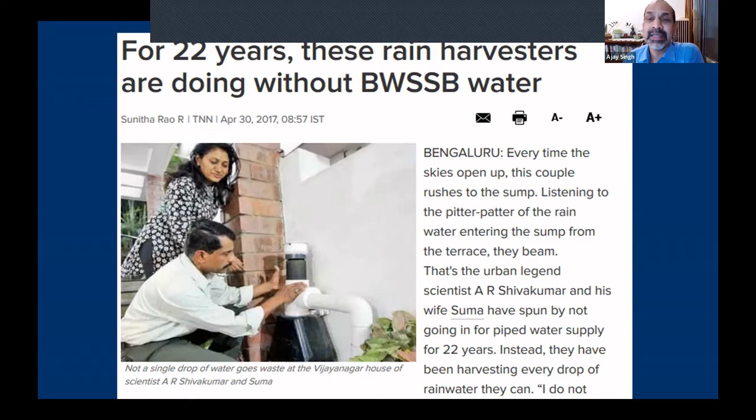And since I became so much interested in water, I started reading. There are very interesting books, like this one by Tristan Gooley called How to Read Water. And of course, Aaj Bhi Khare Hain Talab is another kind of Bible for people who want to do water-related work.

Coming to my current assignment in Southwestern Railway—it immediately enlarged my canvas. As destiny would have it, I got an assignment as Chief Environment Officer for Southwestern Railway. In fact, I'm the first Chief Environment Officer for the Southwestern Railway. Earlier, this portfolio was being looked after by another gentleman as additional charge.

Railway has also woken up to environmental issues, and we created an environmental directorate in the ministry in 2015, and later on in the operational units—the zonal railways like Southwestern, Northern and so on—the environment wing was created. So I'm heading the environment wing for Southwestern Railway currently, and our geographical spread covers Karnataka, Goa, Telangana, Andhra Pradesh, and Tamil Nadu.

So I get a very exciting chance to replicate whatever our learnings were across this geographical spread. We have a route length of over 3,000 kilometers, 381 stations, 132 goods sheds, 2 big workshops, 2 diesel locomotive maintenance units, and 7 coaching train maintenance units. So there are tremendous, almost infinite opportunities for doing many things related to environment.

I'll not discuss this project now because of paucity of time. I come to the conclusion of my project with this couplet.